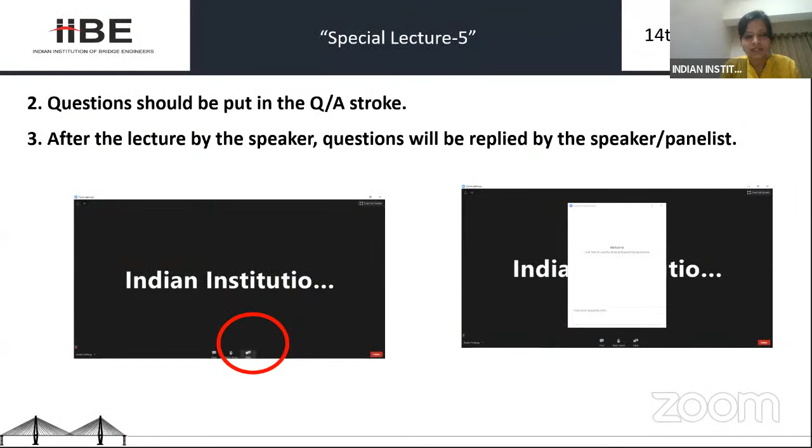All participants will remain on mute mode during the lecture. Questions should be put in the question answer block. After the lecture by the speaker, questions will be replied to by the speaker panelist. Subsequently, attendees can raise their hand using the option below on screen. During questions, specific participants will be unmuted by the organizers.

After a participant's question gets over, the participant should mute himself. Participant's video will not be displayed on the screen. Speaker and panelist can share their screen.

Now, I would like to introduce our Honorary Secretary, E.R. Swapnil Joshi, our host for the day. Swapnil Joshi is an intellect who possesses a bachelor's in civil engineering and double post-graduation from United Kingdom and NICMAR, with specialization in construction project management along with a law graduation.

He has wide exposure in developing systems and had developed expertise in the field of CPM, combining technical and the latest management tools such as Primavera, ESTA, Power Projects, Telos, etc. He initiated and developed a mobile application, Intento Projects, for daily monitoring and real-time data analysis of projects.

With successful implementation of a digitalized integrated approach and his expertise in project planning, BIM, and advanced technologies, he is able to deliver the client's goals successfully. Swapnil has been awarded by the Indian Institution of Bridge Engineers from the hands of Sri Nitin Gadkari in 2014.

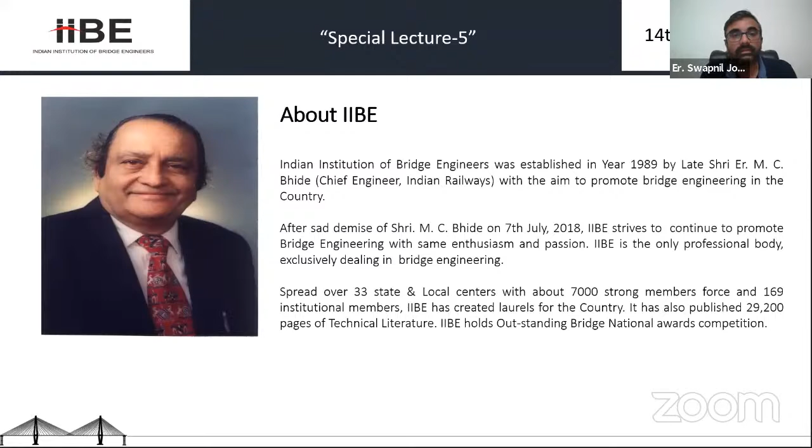With this, I would like to introduce our Director General, Engineer Deepak Divte, who is a civil engineer from College of Engineering, passed out in 1974. Through the 1975 UPSC exam, he joined Indian Railways as a Class 1 officer and retired as Principal Chief Engineer of Indian Railways in 2011. During his service, he worked on many important railway projects, also occupying posts of Principal Chief Engineer, North Eastern Railway, and Southwest Railway Director. He was a board member on Konkan Railway Corporation, chief engineer on the Konkan Railway project, and also chief project manager for tunnels of the Mumbai-Pune Expressway.

And recently, he has worked on Mumbai Metro 3, a 33.5 kilometer fully underground metro construction project, as CGM. So we have great support from our Director General in various initiatives.

Now I'll introduce our President, Shri Vinay Gupta ji, who is also the moderator of today's event. He is a civil engineer from BITS Pilani, 1983 batch, and Director and CEO of M/s Tandon Consultants Private Limited. His specialization is in bridges, flyovers, underground and elevated metro structures, precast buildings, 275 meter tall chimneys, etc. He is an active member of various code committees including BIS and IRC. His contributions include IRC SP65 for segmental bridges, IRC SP71 for precast pre-tension girder bridges, etc.

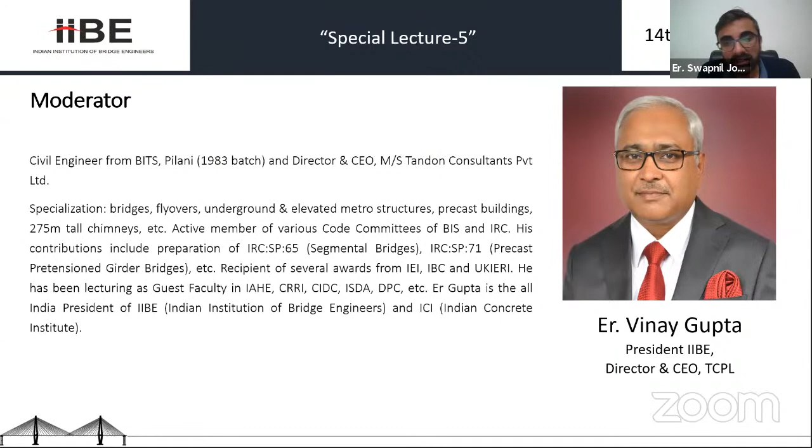So now let me introduce my colleague, Dr. Gopal Ray, a PhD holder from IIT Bombay. His phenomenal level of prowess has enabled him to associate with several prestigious projects, including the Apsara Reactor at BARC, Mumbai Airport Bridge, Strengthening of Mithi River, ASSC Hospital, etc. He is Honorary Secretary of IIBE, General Secretary of the Association of Structural Rehabilitation and Retrofitting, and a committee member of ISSC, BIS, and ACI. He has delivered many presentations nationwide as well as internationally. He is also a keynote speaker and author for 4 international conferences and more than 10 national conferences. Dr. Gopal Ray has published more than 100 papers in journals.

He has also been awarded as one of 50 Manufacturing Innovative Leaders at the World Innovative Congress Award 2019, in Dubai, for 40 Most Influential Leaders Under 40 Years 2017-18 by Asia One, and many more. With this brief introduction, let me invite our Honorary Secretary, Dr. Gopal Ray, to formally introduce today's panelists.

Gopal, over to you. Thank you, Swapnil. It's my pleasure, or it's my duty.

Let me introduce Professor Mahesh Tandon. Before I introduce, let me thank the organizers for giving me the opportunity to introduce Professor Tandon. Professor Mahesh Tandon, Managing Director of Tandon Consultants Private Limited, is an international expert in the field of structural engineering. Many of the structures designed by Professor Tandon and Tandon Consultants have been widely acclaimed and have received recognition in India as well as internationally.

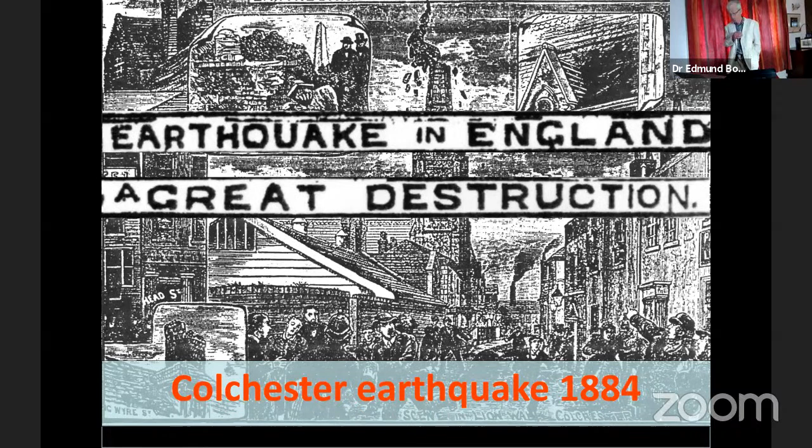Actually, England is not completely devoid of earthquakes. Let's see if we can get rid of that. Yeah, there we go. There was a late Victorian earthquake in 1884. I think it actually killed 2 people, not very many, but still caused a lot of destruction. And exactly 100 years later, when I just started on earthquake engineering, we had another big one in Wales. Big for us, but for you, not really.

Perhaps really what we have to offer from the UK is a great deal of research, design expertise, and university involvement in earthquake engineering. This is the shaking table at Bristol University, one of the centres in the UK. Imperial College is certainly another one, a great centre of expertise in earthquake engineering.

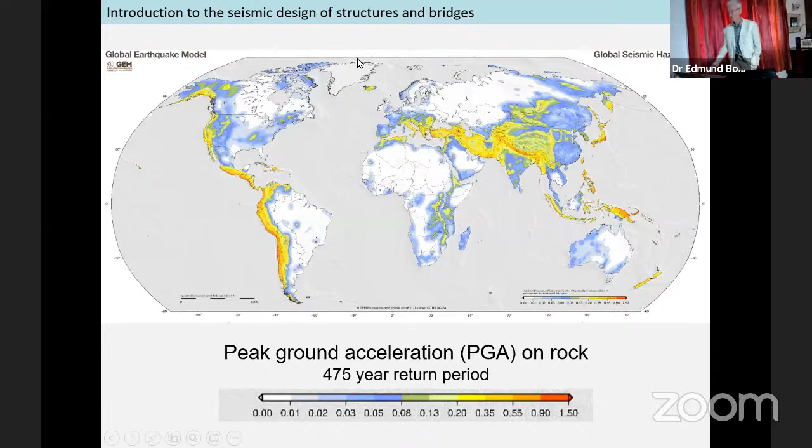Vinay mentioned my involvement in Eurocode 8, which has been long-standing. Let me just tell you how it views seismic hazard. The code actually is going through a very radical revision at the moment. That's nearly complete, and it divides seismic hazard into 4 separate zones. And I think you have something similar in India as well. But in the low seismic hazard, the whites and the light blues, very low seismic hazard, you needn't worry about seismic design. Other considerations like wind loads and minimum robustness rules are quite sufficient to cover the hazard from earthquakes.

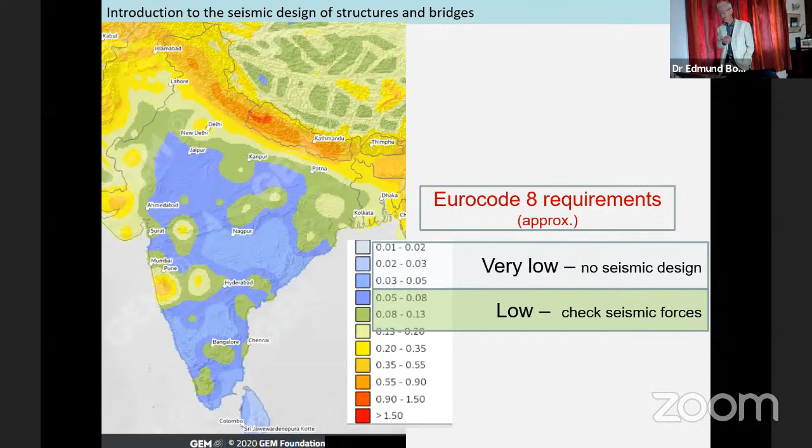So some consideration, but really nothing particularly onerous. Then it's where you get into the medium that the difficulty starts, because not only do you have to do a check on the seismic forces, probably quite a sophisticated analysis, and because it's a higher level of seismicity, the forces are going to be higher, and so may well not be less than the wind forces. But you have to consider seismic detailing as well, and we'll say something a lot more about that later on in the talk.

And then finally, the high seismic zone, and I guess Kashmir. Interestingly, I think, is that Goa there? But anyway, parts of the main part of the Indian Peninsula, and also where are we? There we go. Into Bengal as well. That would be where you have to take full considerations of seismic design.

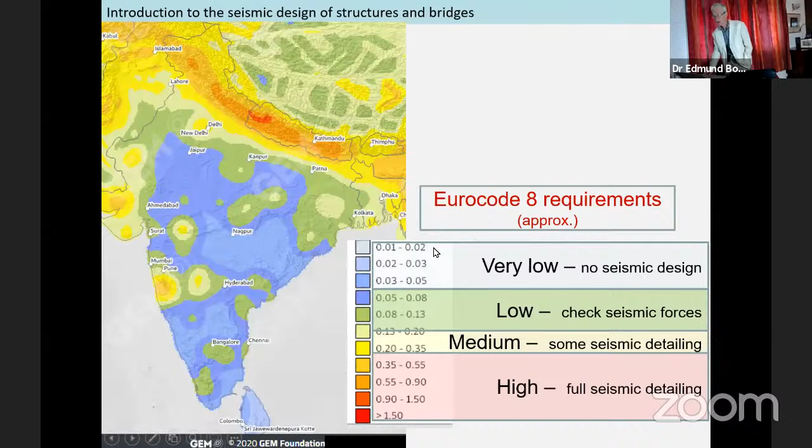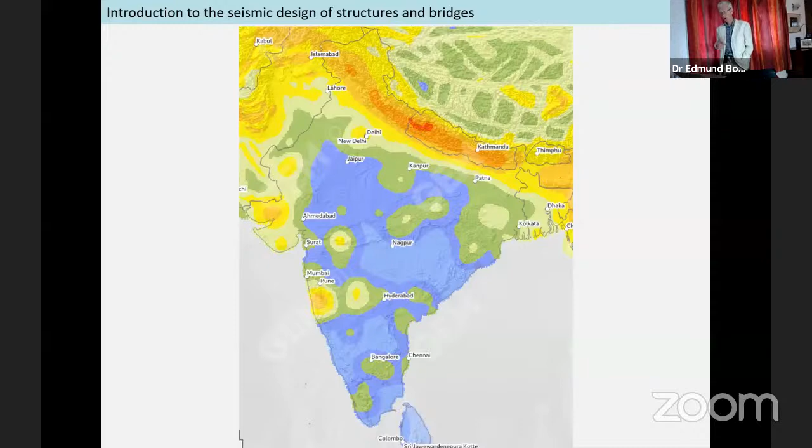So that's this recent map produced by GEM, the Global Earthquake Model, an international collaboration to map the whole world seismically. And you can see it's pretty similar to the zoning that I think is current in the Indian Seismic Code. Places like this and this, and all the way along the Nepalese border, where the Indian plate is shoving into the Himalayas, high seismic hazard. But elsewhere in the country, apart from Bhuj and the area around there, actually quite low.

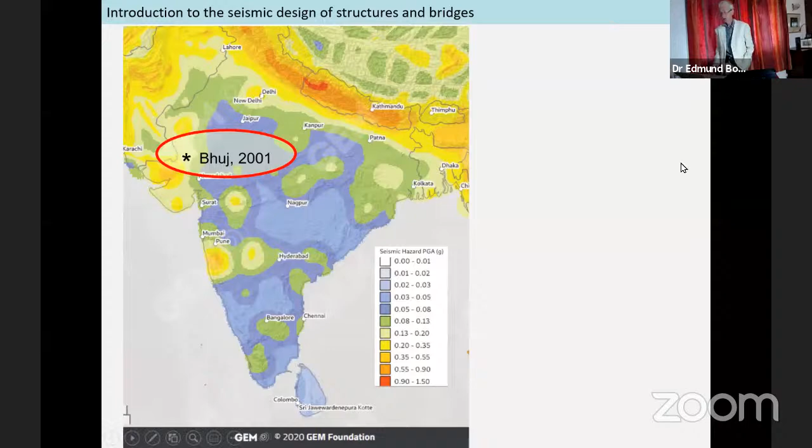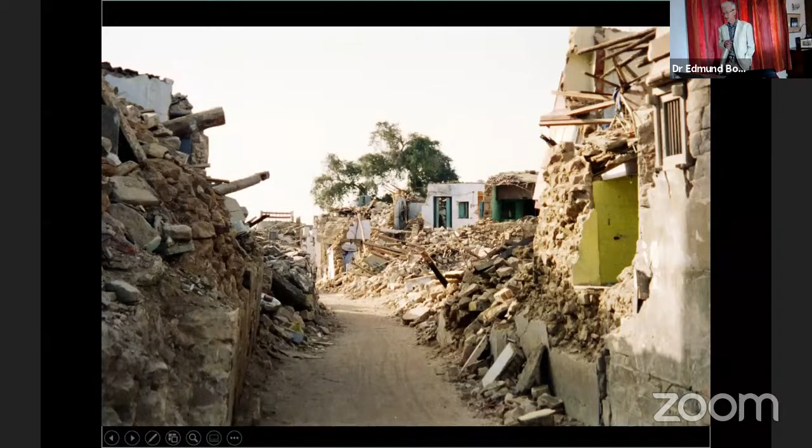The only earthquake that I've actually been to visit in India was the Bhuj earthquake of 2001. Fascinating earthquake, a lot of destruction. I can't remember now how many people were killed, but a great deal of destruction. Many thousands were killed, and many tens of thousands made homeless, and a huge economic impact. And whole villages built of this very weak construction were completely wiped out, with tragic loss of life.

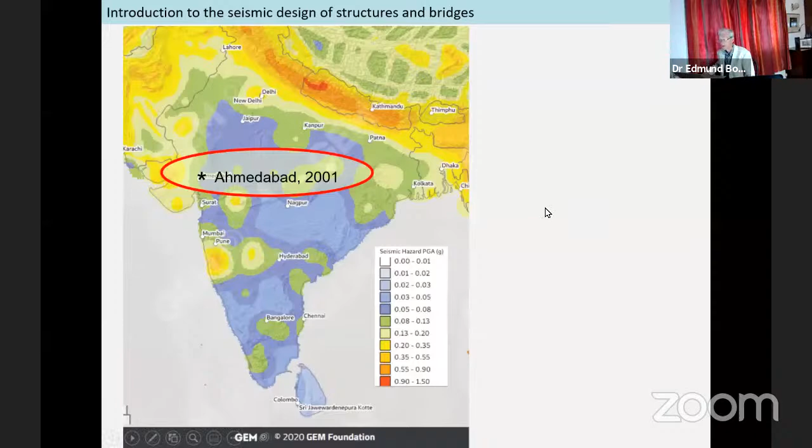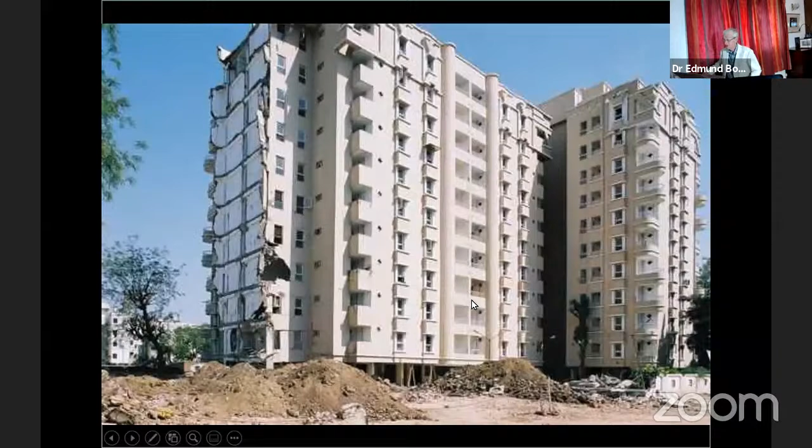So we're talking about the Bhuj earthquake of 2001 and the response of structures in Ahmedabad, a long way from the epicenter, but still very destructive there. A lot of modern construction was very badly struck, and you can see the whole end of that building has just collapsed, fallen to the ground, again with loss of life. Interestingly enough, again, the wonderful heritage structure in the city was much less badly affected. This is a lovely building that has survived for hundreds of years, a number of earthquakes, barely a scratch on it.

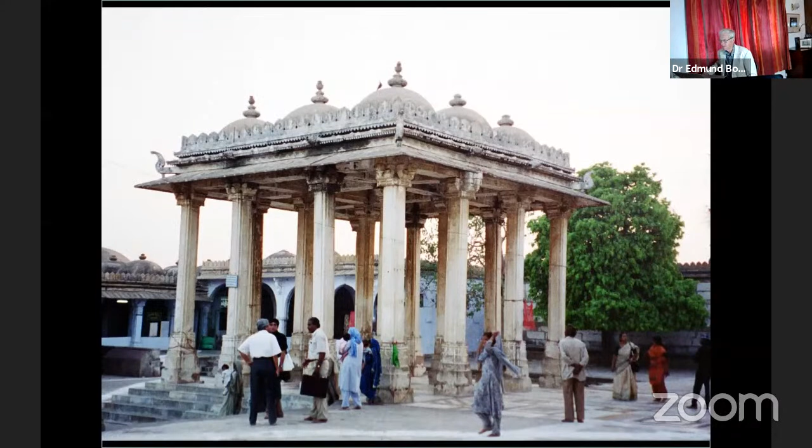So my lecture actually is in 2 parts. I'm going to give a very basic introduction to the seismic response of structures, mainly in the context of building structures, but more generally than that. And then I'm going to go on specifically to bridge structures.

So I'm going to say something very simplistic about dynamics, because if you don't understand dynamics, you can't really understand earthquake loading. So I'm sorry if people have familiarity with this, they'll find it very simple, but I hope for some of you it will be of interest. So now what I need to do is to go back to, now hang on.

I think probably what I'll do is stop the share. Yes, here we go. Can you now see me, please? Nobody's responding. I'll assume they can. Yes, we can see you well. You can see me well. Okay. I hope you can hear me as well.

Right, moving on, I think we'll go on immediately with that. So share screen, share, and wait a minute, let's have a look. Let's go, hang on. Yeah, here we go.

Okay, so probably most of you are familiar with these resonance charts for continuous vibrations, and what they show is the response of a simple structure, a mass spring damper system, which will have its own natural period of vibration. And they measure its response up here to an input ground motion. And you can see that if the structure is very floppy, the ground moves underneath and the mass stays where it is. So for a large ratio of structural period to ground motion period, low response.

By contrast, if the structure is very stiff, it just moves exactly in step with the ground and there's no amplification at all. But if the structural period of the mass matches that of the ground motion, then you get a huge increase in response. And the response is very sharply dependent on the level of damping, this dashpot here. So for an undamped system, the response shoots off theoretically to infinity, but to something really large. Whereas if you've got 20% damping, you're going to reduce the response very greatly.

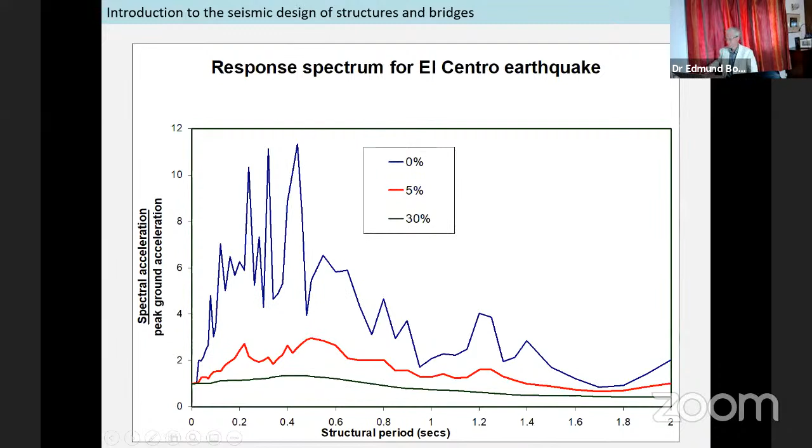Oh, now I've pressed the wrong button, there we go. Sorry. Go to, sorry. No, let's just go back. Home. Right, no, I've done the wrong thing again. Sorry.

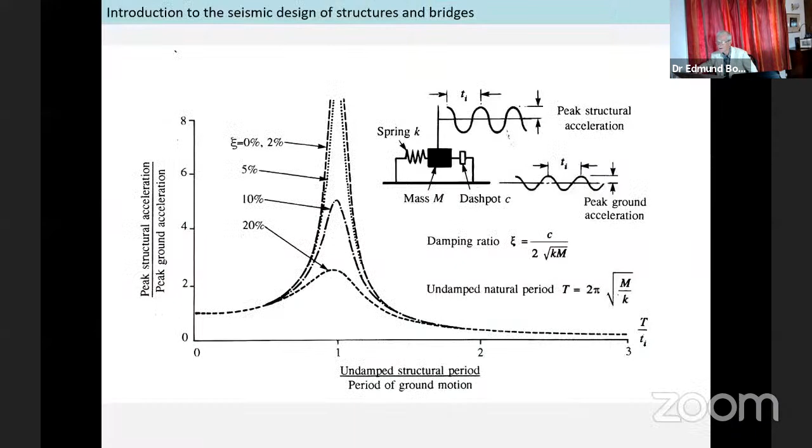Okay, here we are. So I said that the foundation soils are a crucial aspect, not just for supporting the structure, but also in determining what sort of loads the structure is going to see in an earthquake, because the soils affect the period of vibration of the structure and hence how close the structure is to resonance with the forcing motions. And the classic case of that was Mexico City in 1985, my second big earthquake, which I investigated on site.

Mexico City, as you may know, the center of it is built on a dried up lake bed with some quite deep, very soft clay soils, and it's surrounded by much harder material. There was a big earthquake in September 85 on the Pacific coast, about 300 or 400 kilometers from the city, and by the time the earthquake vibrations reached the edge of Mexico City, the level of vibration was actually quite low. So a peak ground acceleration of about 3%.

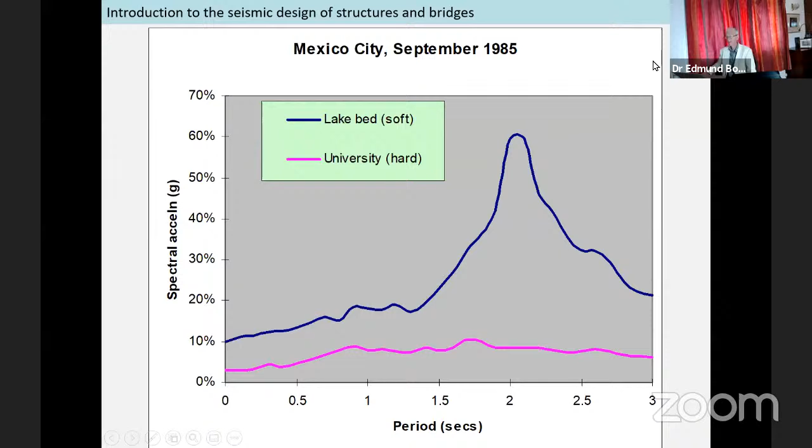So if you were a 15-story building, you'd see something of the order of 10 or 12%. But still, most modern, well-constructed buildings or other structures could easily cope with that. However, as you moved from the hard ground on the edge of the city to the center of the city, where you had these soft soils that wobbled, this is what happened. You got a massive increase in response. So here the period of vibration of these deep clay soils was about 2 seconds. So tall structures of say 20, 25 stories were very badly affected in that earthquake.

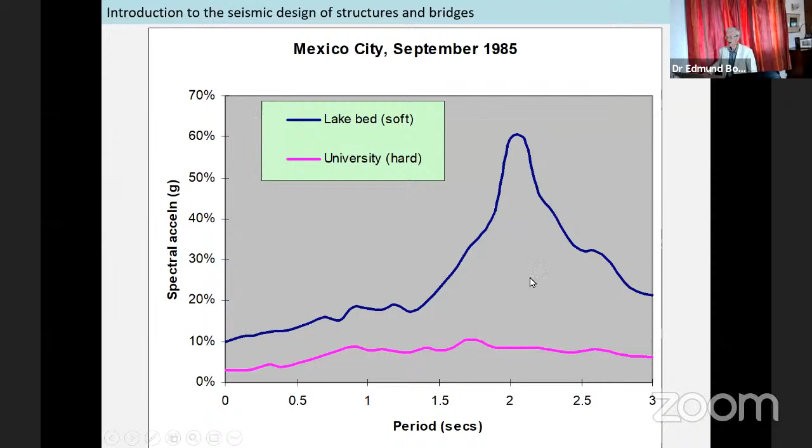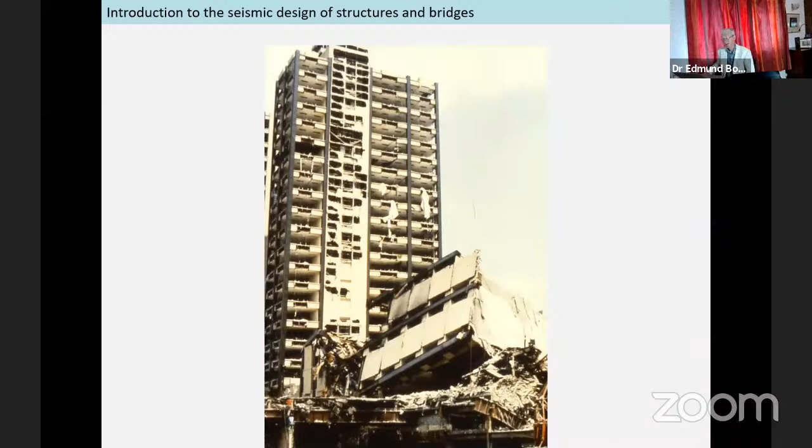Usually the influence of the soil is not quite as extreme as this, but it's still significant. So here is one of the tall structures in Mexico City which collapsed. It picked up the vibrations of the clay soils wobbling around underneath it, and it collapsed, as you can see. This is well known. It's been well known for 35 years, I suppose, and before that, and well recognized in codes.

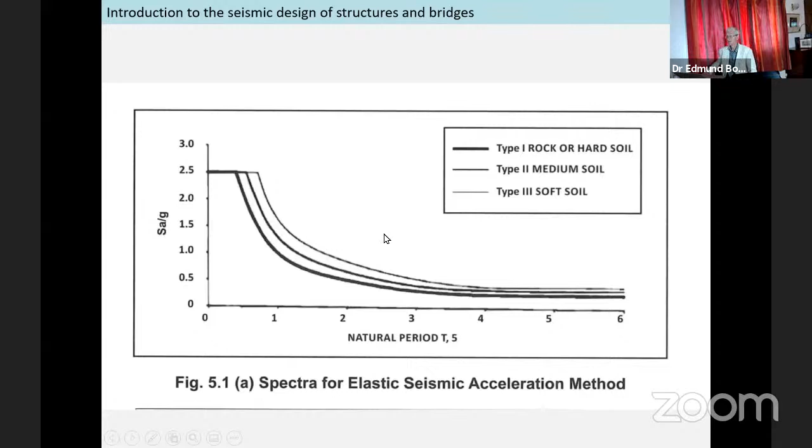So that's dynamics. I want now to talk about ductile and non-ductile response, because again this is a very crucial feature of earthquake engineering that must be taken into account. So if I stop screen sharing and show you my second exhibit, I'm afraid this is very simplistic, but bear with me. Now let's have a look.

Let's have a look. Is that better? You can't really see it. I hope you can see this now. Yes, yes, you can see it. Yeah, it's a bit of spaghetti, right?

So it's quite flexible, and you bend it a bit and it's fine. The problem is, you can imagine this as a building, and the earthquake comes along and it waves around and it's fine. But if the earthquake suddenly gives a big bang, it breaks. The building collapses and everyone inside is killed. That's a very brittle response. That's what you don't want in earthquakes. You want something to be able to absorb the shock from the earthquake.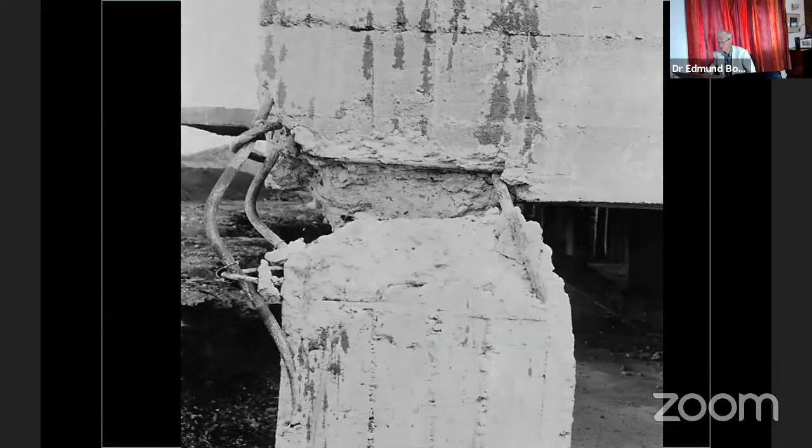But when the earthquake came along, of course, the top didn't want to move, but the ground story was very flexible, and all the movement occurred there. And you can see what happened. If you look at that joint there, you can see this building was actually on the verge of collapse. And in fact, 3 very similar buildings next door had collapsed.

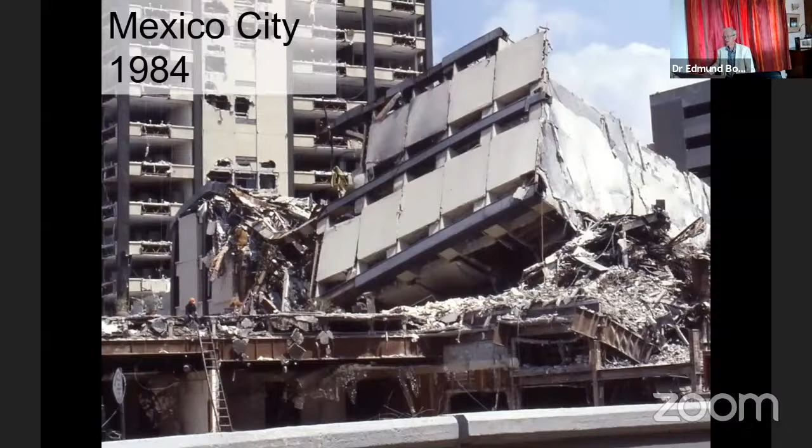Say a little bit about steel structures. Steel structures actually are not immune from earthquake damage. Mexico City, this tall steel building, was one of the first major steel buildings to collapse, and it caused a bit of a rethink among earthquake engineers. Just merely ensuring that you were built in steel didn't necessarily protect you.

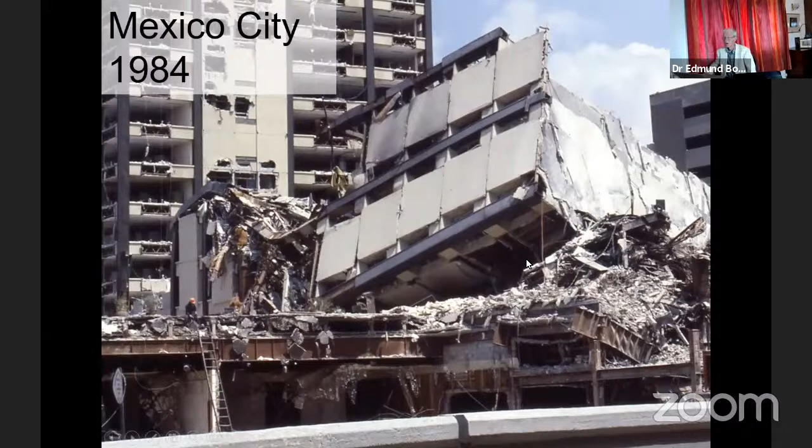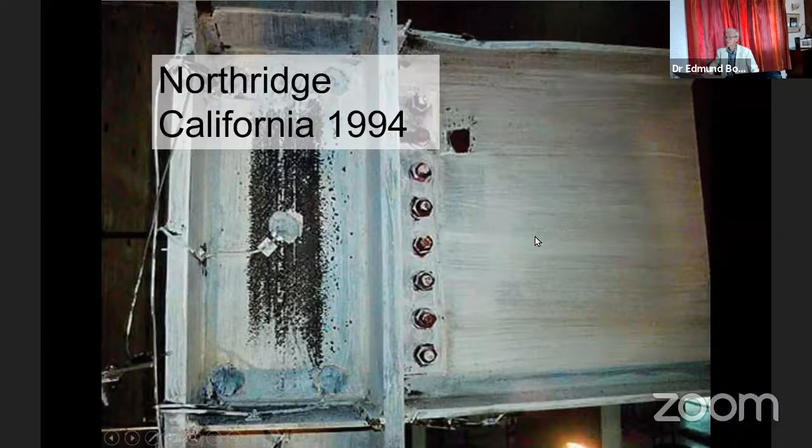And then it got worse, because in California in 1994, there were another very disturbing series of failures in steel structures. Here is the typical construction detail of steel moment frames in California, permitted by the code. This joint is entirely code compliant. It's being tested in the laboratory, and it looks all right at first sight, but if you look down there, you can see what's happening. A big fatigue crack has started to form.

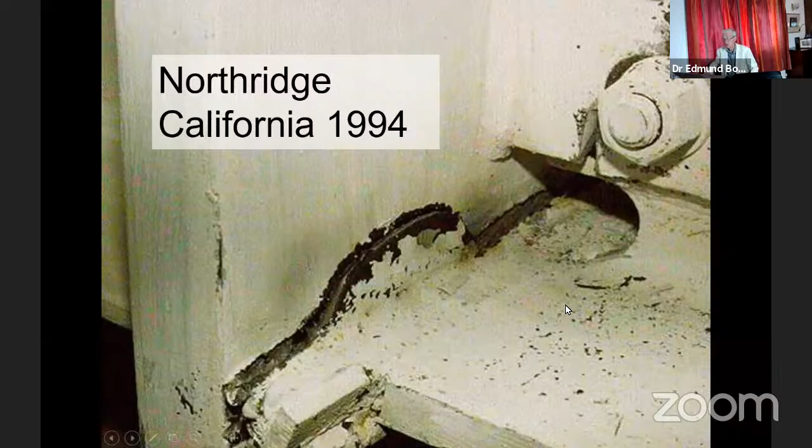So steel is not immune from earthquake damage, and it's easier to achieve in most cases good ductility in steel structures for a number of reasons, but you can't take it for granted. I think I'm going to skip that slide.

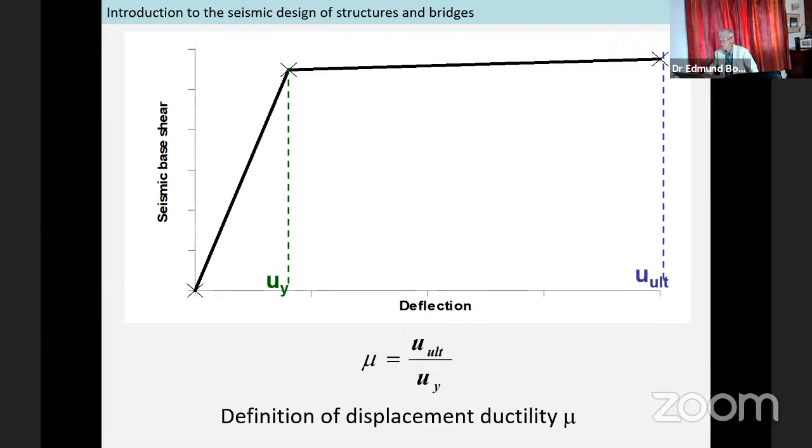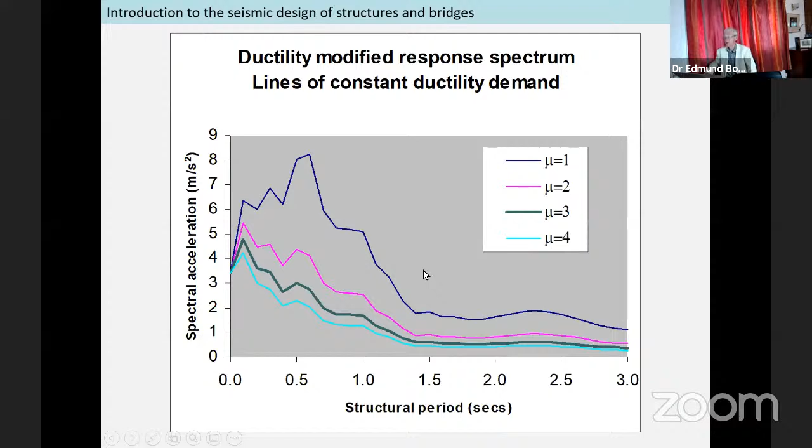Of course, it's not just designing for the seismic forces. In order to achieve that large ductility, you have to do the detailing and the choice of yielding mechanisms which will allow you to sustain that very large plastic response. I think this chart has actually been superseded - you'll correct me later - but the R factor in codes is essentially the mu factor, the ductility ratio.

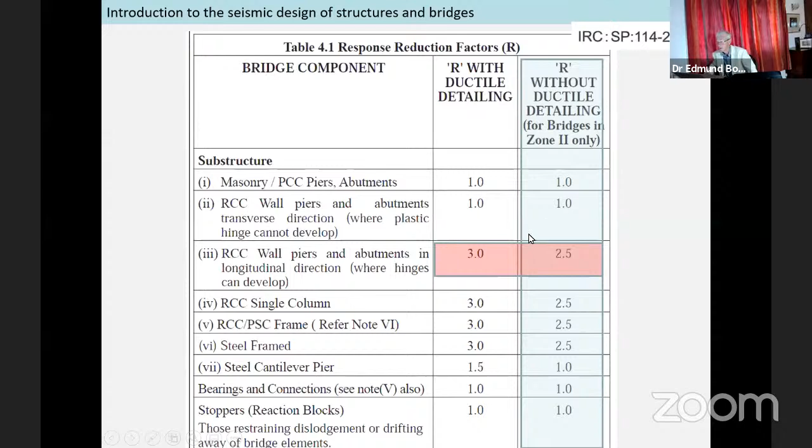So this is what you can divide the elastic response by, if you go for ductile detailing. This is what you have to go for if you don't, and there is a reduction - if you don't have ductile detailing, then the reduction in force that you can allow is much less. And it's interesting that this type of non-ductile detailing is only allowed in fairly moderate seismic zones in the Indian code. Right, I've talked a lot about mainly building structures. Now here's something about bridges.

And can I go on for another 15 minutes? I think it'll take about that. Is that okay? I'll take silence. Yes, I think 15 minutes is fine. Yeah, okay, right. We have time, no problem.

So, ductile and non-ductile response, we've talked about that, and it still applies to bridges. Here we are - that's not a very ductile response, I think you can agree. It's a bridge in California which was essentially destroyed by the Northridge earthquake. And you can see that although there's masses of vertical main steel in this bridge column, there's not sufficient lateral steel to stop those bars from bursting out and the concrete from crushing inside.

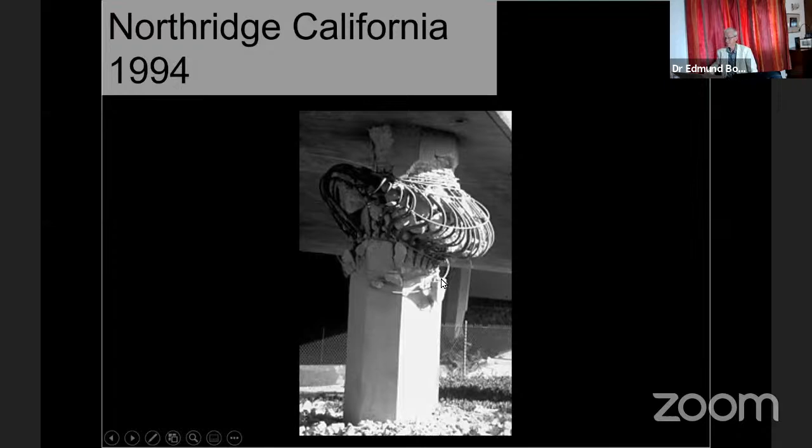An earlier earthquake in California, exactly the same thing happened. This was the famous two-decker Cypress Street viaduct in San Francisco. It was a pre-stressed, very brittle construction. A lot of brittleness in these columns, and they just completely failed. And the top deck came crashing down onto the bottom deck, and quite a number of people were killed.

The Japanese have always been, well, up to the time of 1994 or 5, have always been a little bit suspicious of ductility as a strategy for reducing the strength of structures. So they've tended to go for low ductility and massive structures.

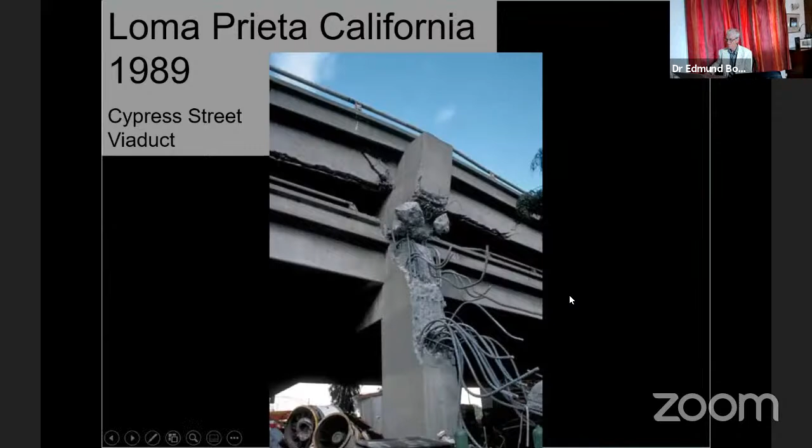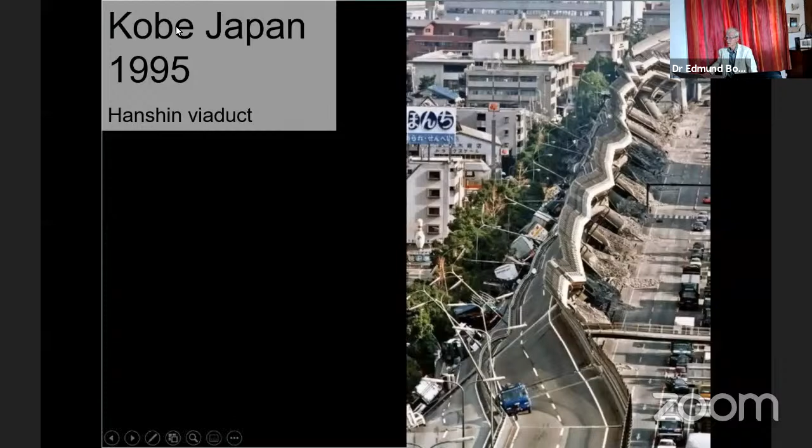And this is what happened in Kobe, Japan, in 1995. I'm sure you've all seen photographs of the Hanshin viaduct. Massive columns, absolutely massive columns. But look what's happened at the base - classic non-ductile failure. So the Japanese had a severe shock then. They thought the great strength would protect them in an earthquake, and Kobe taught them that that wasn't going to happen.

So ductility and brittleness, still things you have to consider, not just in buildings, but also in bridges as well.

Liquefaction is where the soil loses its strength during an earthquake, and that's a huge problem for bridges. This is the Philippines in 1990, a river bridge, and it's not the structure that's failed actually, it's the foundations, and this bridge is now completely impassable.

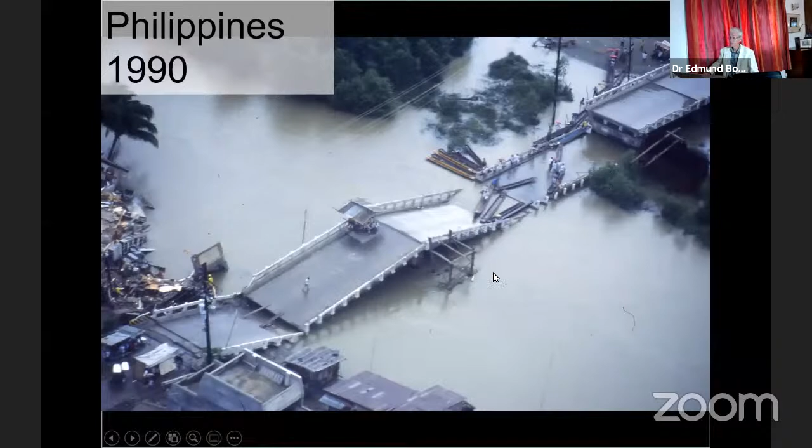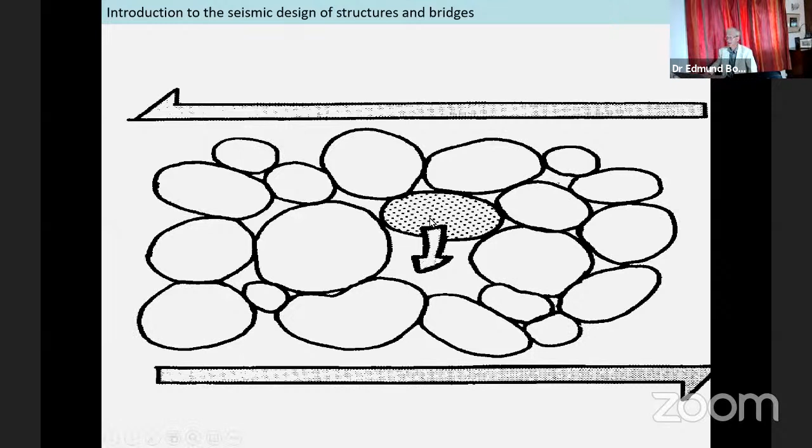And under the action of cyclic shearing, of horizontal movements, first one way and then another, this soil tries to compact. But the problem is that there's water in the way, so the pore water pressure rises and the particles get pushed apart. When they get pushed apart, they lose the frictional shear resistance that's being relied on to support structures. So the loss of strength is because under the action of this pore water pressure rise, the interparticulate friction is lost or severely reduced, and hence the shear strength of the soil is severely reduced.

Just to go through briefly the four conditions necessary for liquefaction to occur: you've got to have a soil which tends to densify under cyclic shearing.

Right. Thank you, Anna, for producing that water.

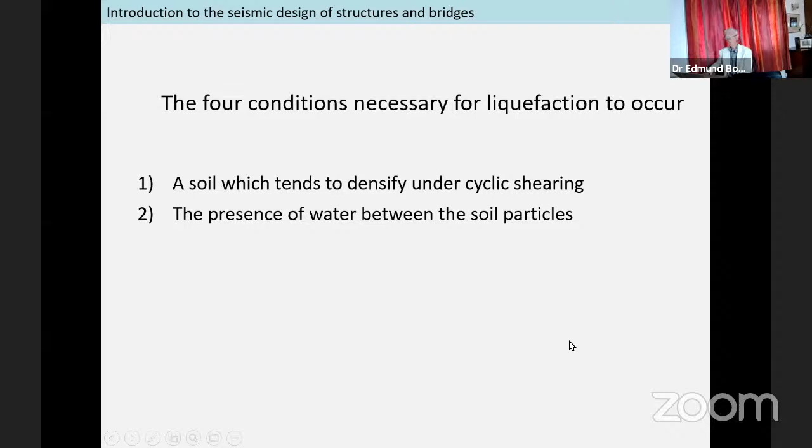So loosely packed soils, loosely deposited soils, are particularly prone to liquefaction. Secondly, you've got to have water, dry soils do not liquefy. These two suggest that marine structures and river bridges crossing rivers are particularly prone to this sort of liquefaction failure, because the river means you've got water, and the soils may well have been laid down rather loosely over many decades, so you may well have a rather loose soil which will be particularly prone to liquefaction.

Two more things: you've got to have a soil which derives at least some of its shear strength from friction between the soil particles, because that's the mechanism of failure. It's the loss of that friction that causes the loss of strength. So it's sands which are particularly prone to liquefaction. Clay soils don't rely on interparticulate friction, so they don't liquefy.

And the fourth one is you need something to prevent these excess pore water pressures from draining away very quickly. What might prevent that? Well, what might promote the free drainage of the soil? If you've got large soil particles, if you've got gravel, then there are large spaces between the gravel, so even if it does want to compact a bit, the water can move out very freely, and the pore water pressures won't build up. So generally speaking, it's only fine to medium fine sands that are prone to liquefaction.

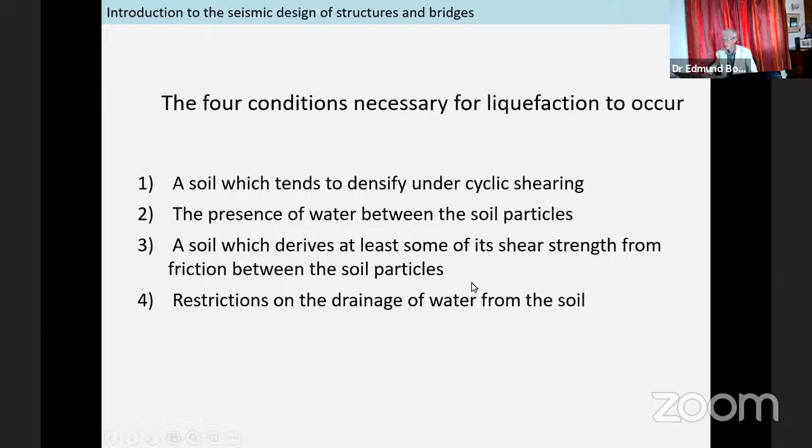So how do you know whether you've got liquefaction? Obviously you go through that checklist and think whether it's possible. Seed and Idriss, some 30 years ago, worked out the basic method which is still used, and it's in the Indian code. It's quite complicated - this is a simplified procedure, and the technology and information is developing all the time. If you're interested in the subject, I'd commend you to look at the latest provisions in the Eurocode, because they've been updated a lot during the current revision.

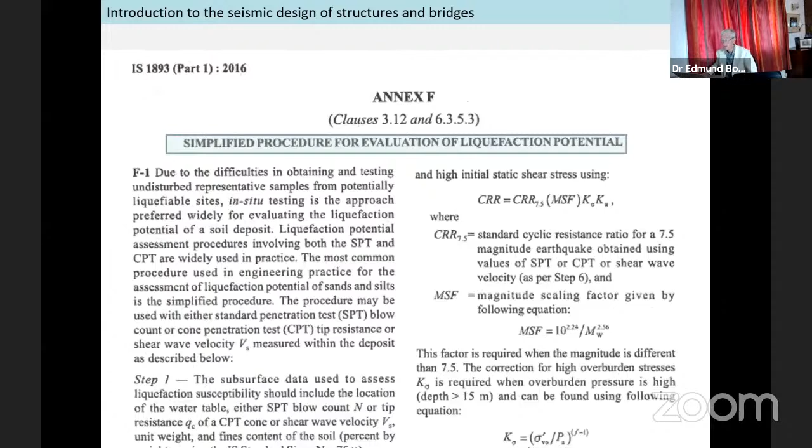Right, so we've talked about brittleness and ductile behavior. We've talked about liquefaction and loss of support. Fault rupture - well now...

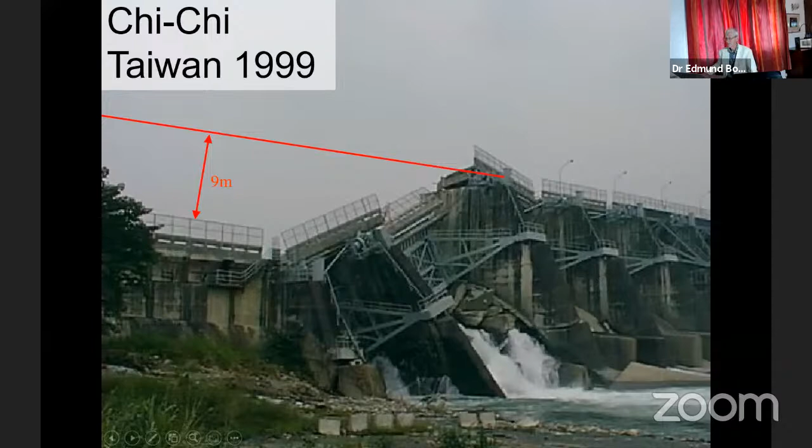Here is a dam - it's not a bridge, it's a dam which crosses the main fault that caused the Chi-Chi earthquake in Taiwan in 1999. This is where you can see where the fault went through, and the fault displacement vertically was a massive 9 meters. Fault displacement is generally not too much of a worry for building structures, because they've got a relatively small ground footprint. But if you've got a long linear structure like a dam, or indeed a bridge, it is going to be very prone to that. So where you're crossing a fault, and this dam did, unless you take some very careful measures, you're going to risk this sort of thing happening.

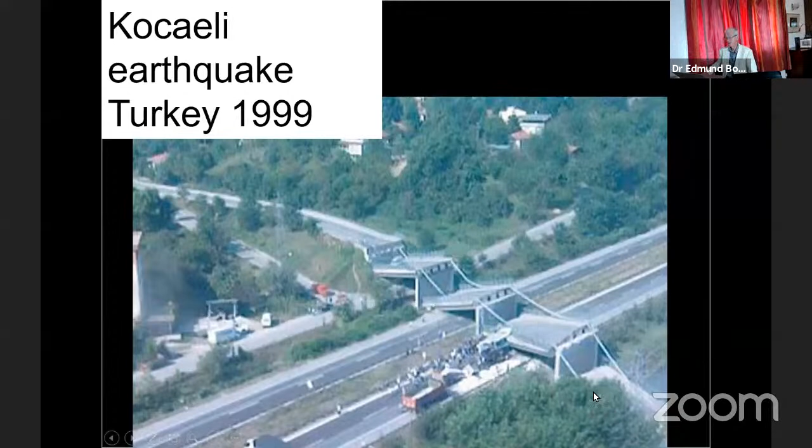Interestingly enough, in the Kobe earthquake, the Akashi Kaikyo bridge, which I think is no longer the longest in the world, but it certainly was at that stage, crossed the main causative fault, and the two main piers moved something like several meters apart horizontally.

It had actually been considered in design, and it wasn't a problem because the structure is so long that it's fairly flexible, and a relative movement of a couple of meters between the piers in terms of strain is really quite small, and there was no damage to the bridge at all. It's still standing, and so that was a success in Kobe.

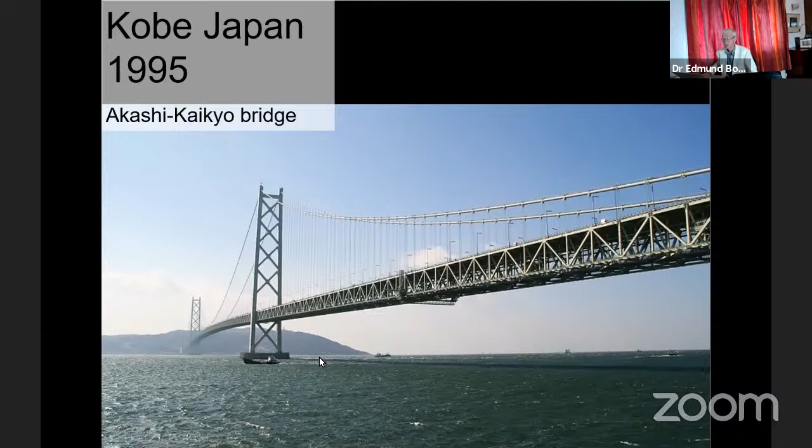And the final one I want to talk about is loss of decks on bridge bearings. And this is the classic photograph from the 1981 San Fernando earthquake, when suddenly it became rather obvious what the problem would be. The States had embarked on a massive highway building program in the 60s and 70s, and built a lot of these overpasses consisting of separately supported concrete spans on bridge piers. The earthquake came along, and you can see it just chucked the bridge spans off their supports.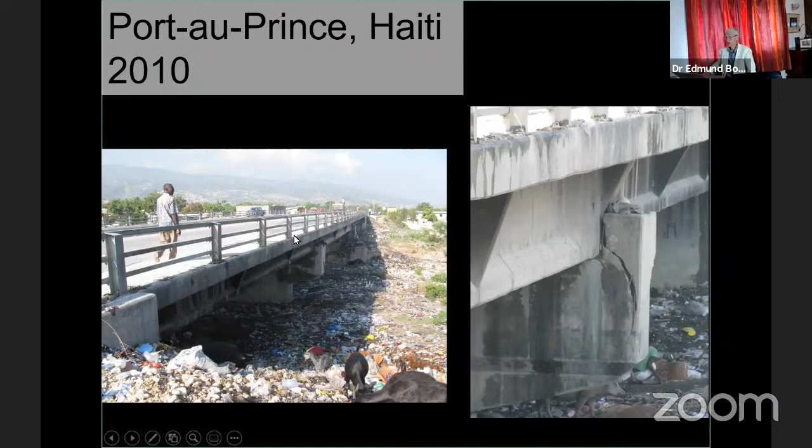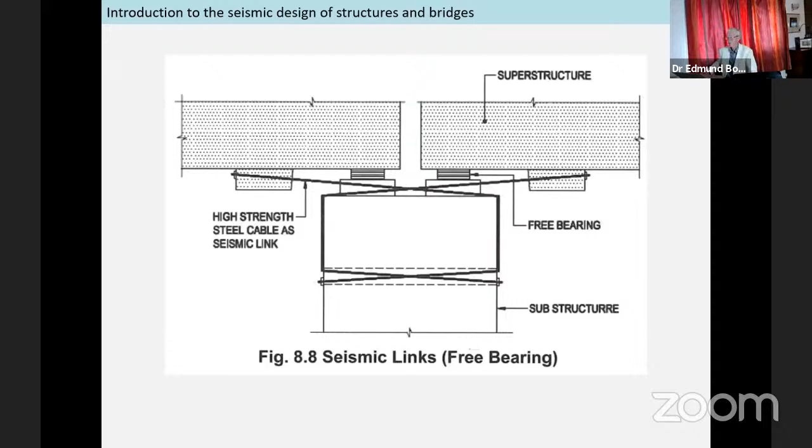And this is a detail. It's not my field, but actually preventing the bridge deck from leaving its support is not rocket science, really. You just need to hold it in place. This sort of steel cable restraint, I think, was the preferred method in the States, certainly up to a few years ago. But there are lots of other ways you can do it, and it's not that expensive. It's pretty simple stuff, but it works.

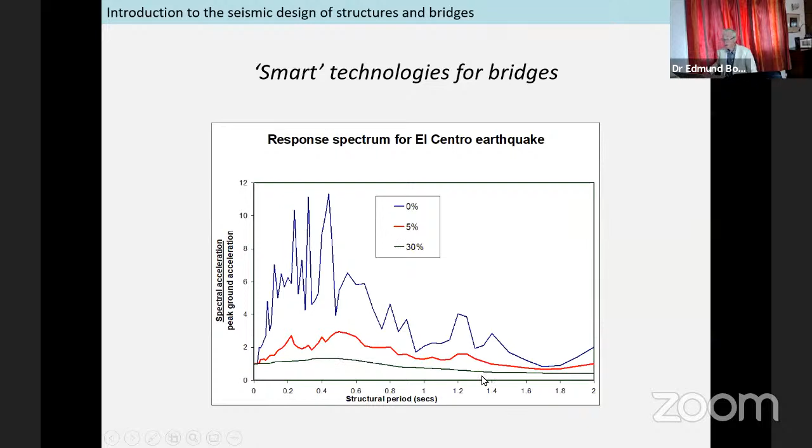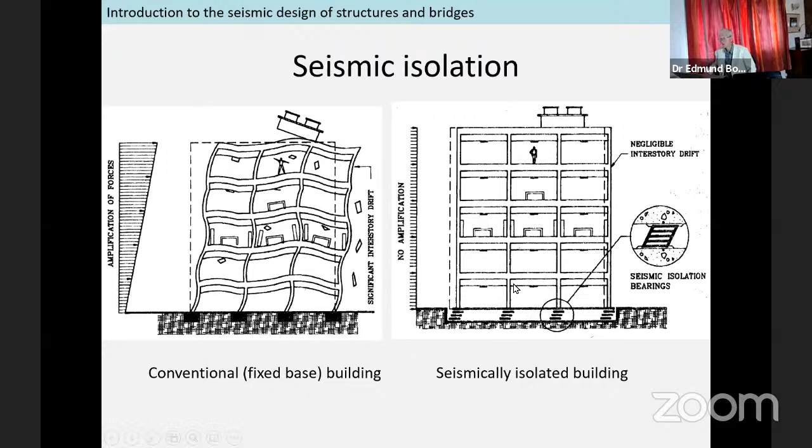Mount the building on resilient isolation bearings, and essentially the ground moves underneath it, and the building stays where it is. The roof structures are okay, and not just the structure, but the building contents are undamaged. A hugely successful technology, actually developed in its modern form in New Zealand in the 1970s, and adopted all over the world. I believe now that all Japanese hospitals are built as seismically isolated buildings, and I think most of the ones in the States as well. Well, in California and seismic areas of the States.

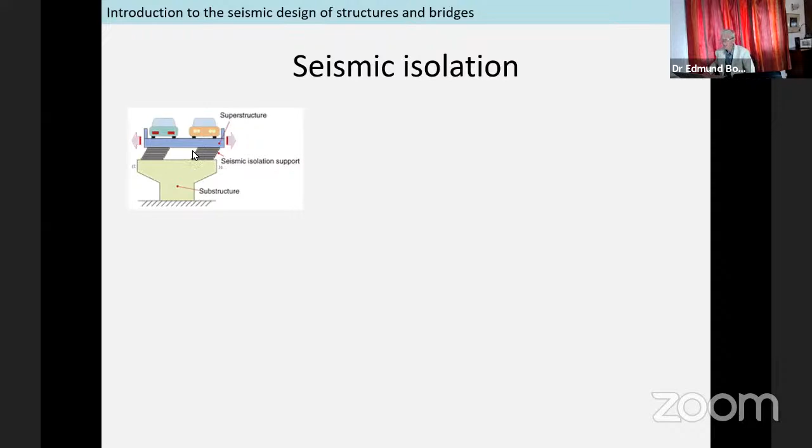Well, perfect for bridges, of course, because bridges often have bearings anyway. So you just need to tweak the bearings a bit. They need to be a bit bigger and a bit more flexible, but you've got a perfect way of isolating the bridge deck from the substructure. It's just the same principle.

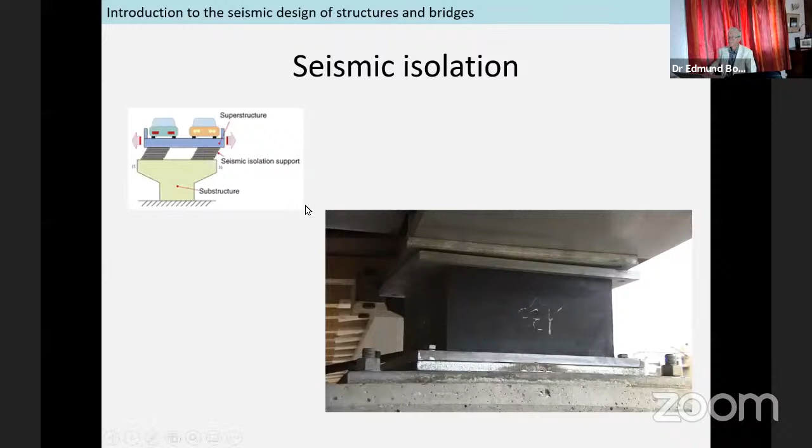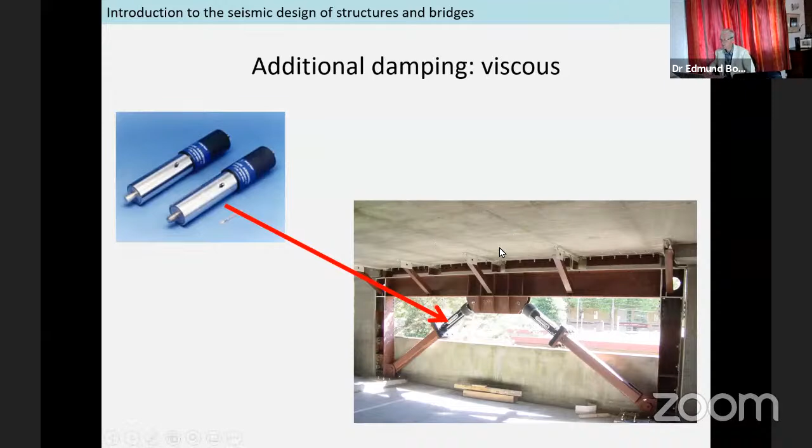And this is a photograph I took in San Francisco in 2016. It's the west abutment of the Bay Bridge, not the Golden Gate Bridge, but the Bay Bridge.

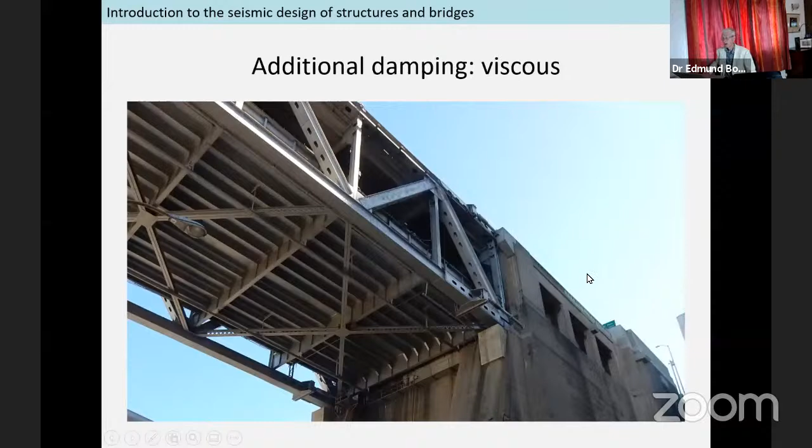Massive bridge, badly damaged in the Loma Prieta earthquake of 1989 and retrofitted. And what they did was, you can see if you look up there, they introduced these big dampers. They did lots of other things as well, but one of the things they did was to introduce these big dampers so that when the bridge deck was being shaken around relative to the abutment by the earthquake, these dampers worked in and out and damped down the motion. So highly effective.

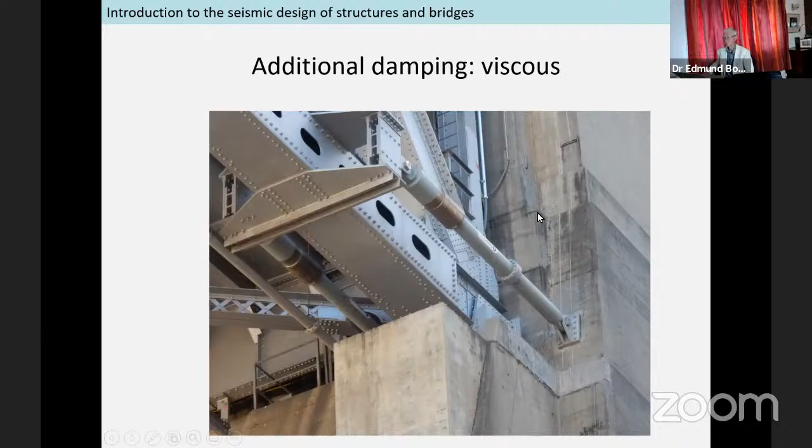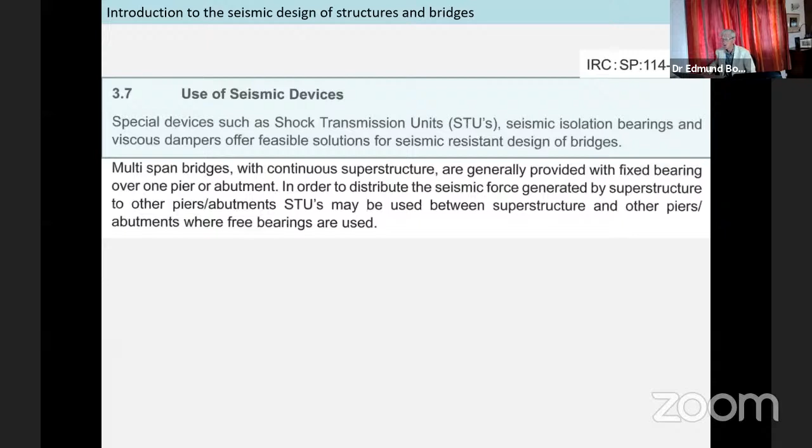Right, and well recognized in the Indian code. I'm pleased to say there's a lot in Eurocode 8 Part 2 as well, particularly in the new edition, about these technologies. So there's lots of sources there.

Right, further reading. Well, I've got to start with my book, haven't I? As now a retired engineer, I've handed over the principal editorship to a younger engineer, Damien, who I've known for many years. He's a rising star in Arup, the major consultancy. Perhaps he'll be running it in 10 years' time, I don't know. But anyway, he's done the main work of revising the 3rd edition to the 4th edition, and it's pretty much there. It's actually in press at the moment. They hope to get it out by Christmas. But that is for buildings. But we talk a lot about other aspects too.

The specifically bridge textbooks that I know is Priestley, Seible, and Calvi. I knew Priestley quite well, and sadly he has died now. Gian Michele Calvi also I know. Seible not so well, but it's a very good book. But it is 24 years old, so not smack up to date. A much more recent book, again, I know Andreas Kappos and Nuray Aydinoglu quite well. I don't know the other two authors. I think that's probably a more academic book, but I'm not really quite so familiar with it.

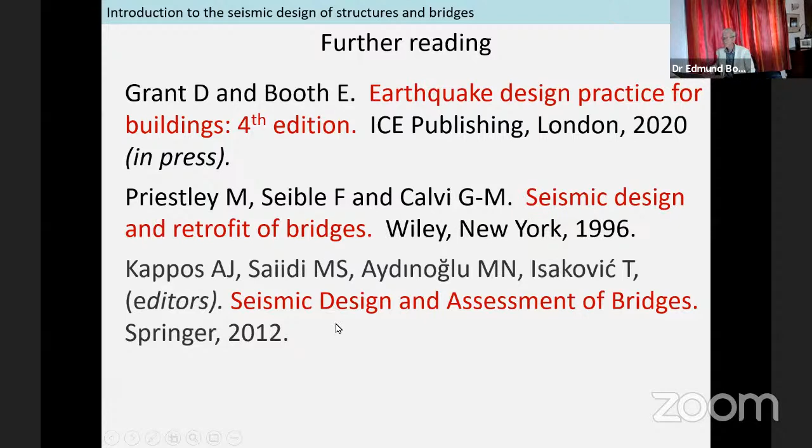So friends, first of all, we talk of industry-academia interaction, and I'm sure there must be several people from academics here, from colleges and all that. And of course, there are many from industry that I know. Dr. Edmund Booth has a fantastic combination of both these. Whereas in India, Dr. Booth, we have those institutes where the professors teach, which is more or less fully academia. And then they invite some of the industry people like us, you maybe, and they have lectures and they call it industry-academia interaction. In fact, Professor Tandon also was very active with IIT Kanpur and also IIT Gandhinagar now. So I think the whole combination is the one. So it's a two-in-one personality we have in front of us.

And you started very well, and you gave us good news or bad news, that EC8 is undergoing a radical change, which I made a note of, and I hope you are able to catch up with those radical changes. And good, you started with Indian projects, Indian cities, Indian monumental structures, that gave us some kind of a feel that the UK has a heart for India. And of course, I'm glad you talked about liquefaction, which is a favorite topic of the panelist, Professor Mahesh Tandon. He is known and recognized for this topic. And then you talked of seismic devices, wherein we have been preparing the code. And I am doing a lot of work on seismic devices from Indian standards, not from your standards, honestly. So that's very good to hear that we are all on the same wavelength.